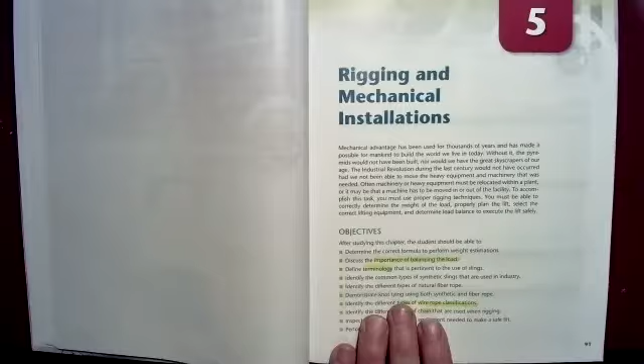So let's hit on some of the key things. Number one, we're going to talk about why you want to balance your load. When you're lifting, it's critical to have good balance. If you don't balance your load, then you might have a point that you are attaching to the load that has much more force on it than it should, and it might snap. So that's very, very important. Or if you're having a single point lift, it might flip over. Also bad.

Terminology is going to be key. As I've outlined in many classes in mechatronics, if you speak like you know what you're doing, you know what these terms mean, then you can communicate effectively with other members of your team, and you sound smart and people want to work with you. So terminology is key. We're going to spend some time on wire rope. Wire rope is the proper term for steel cable. Wire rope is just like it sounds. Instead of having strands of fiber like fiber rope does, it's got strands of wire.

We're going to talk about chains. That's important too. Chains are probably the most common use of rigging out in the general purpose world. You're going to see that all over most plants. You're going to see it all around any kind of construction. You're going to see that on the farm. Chains are probably the best general purpose tool for lifting.

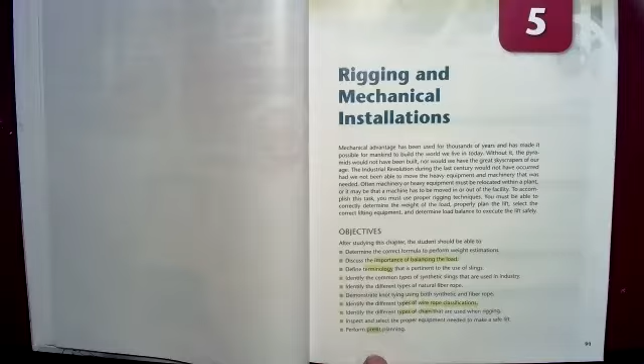And lastly, I'm going to emphasize pre-lift planning. Plan for the lifts. Unless you're just lifting something with a forklift that's a pretty ordinary load, you have to think about the steps that you're going to have when you lift that thing. So that's just what we're going to start with.

So, book review. The first section, 5.1, talks about formulas and weight estimations. And in the first section here, it just talks about units of measure for length. Great. You guys should all know that. Scan through the table. That's useful information. And it talks about some conversions. Useful, interesting. You should know the table's there. You might want to use this table later on when you do some calculations.

The book also talks about basic calculations for area and volume. And it gives you area and volume calculations for a variety of shapes. Cylinders, spheres, parallelograms, squares, rectangles, and a variety of formulas. I'm not going to quiz you necessarily on these, though I do have a couple questions in the quiz that touch on these. I am going to ask that you scan through this section of the book and remember where it is in case you need these formulas in the future.

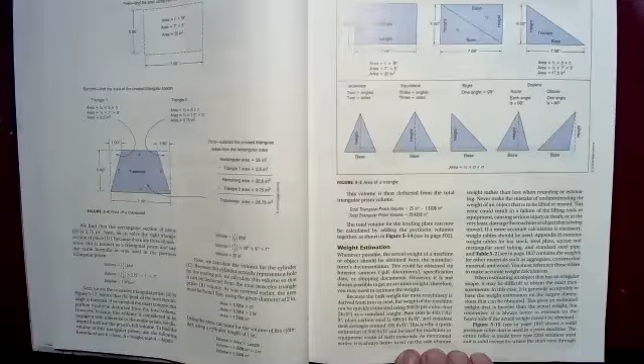The vertical center of gravity is very, very important. You have to be able to pick up an object so that the center of gravity is in the middle of the object. That means that my vertical center of gravity is symmetrical. So I'm picking up above my vertical center of gravity. Right? If something is very light on one end and very heavy on the other end, then I need to shift my lift point over towards the heavy end.

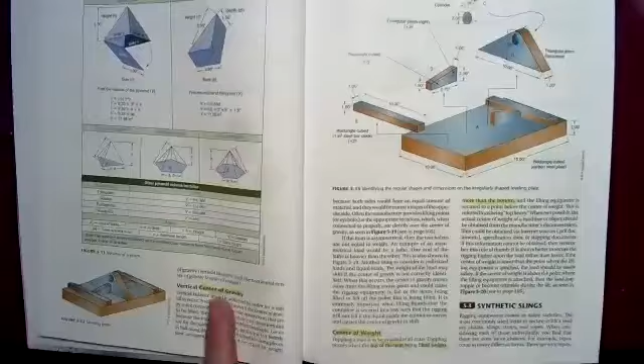Center of gravity, read through the definition. Center of gravity is looking at the weight and the position. Center of weight is more talking about something being top heavy or bottom heavy. Right? Center of weight, if I've got something that's very top heavy and I lift it from the bottom using a sling, then it's going to flip over easily.

Like if the sling is not cinched down, if I don't use a choke hold on that sling, and I've got something that's very top heavy, and I'm just a little bit off on my center of gravity, then that center of weight, that top heavy item, will fall over and pull it right out of that sling. So I have to be very careful to try to lift things directly over a center of gravity, and or try to lift things that are top heavy as little as possible.

So these are two very important terms. Center of gravity, center of weight. Vertical center of gravity, center of weight. They're talking about two different things.

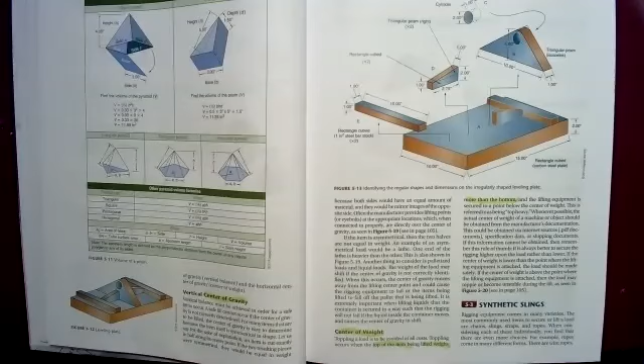All right, section 5.3. In section 5.3, we start talking about the slings themselves. Slings are ways that you can grab the object that you want to lift. Often we make a sling to grab the object, and then we bring down a big hook for a hoist of some sort to lift that object. So we first learn about slings.

And there's two key controlling things about slings. First of all, I want to mention OSHA standards. 1910-184 talks about your OSHA standards for slings. So hopefully you're already familiar with this standard, and you already understand some of the rules around slings. They have to meet certain OSHA regulations.

They have to be inspected and in good shape, and we're going to spend some time looking at the OSHA regulations in the OSHA class. But the key thing is we're also going to talk about inspections. Inspections are critical. So sling terminology is also important. They use different methods of tying slings to different objects, and they each have different effects.

A basket hitch, and we're going to look at the pictures on that later, is a way of looping a sling gently around an object to lift it. It's a great way of lifting objects that are bottom heavy, and a great way of lifting objects where you've got multiple baskets on the object, especially if you've got a spreader bar lifting so that you can have 2 points of lift, one on each basket when you're lifting something up. It's a nice, gentle way to lift something.

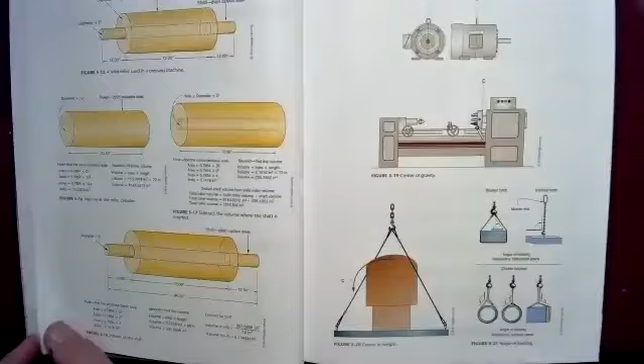And another term is proof load. You'll see that in here. So I'm just going to emphasize those terms. Very, very important terms. These are all part of the calculation slides. These are part of your center of gravity or center of mass.

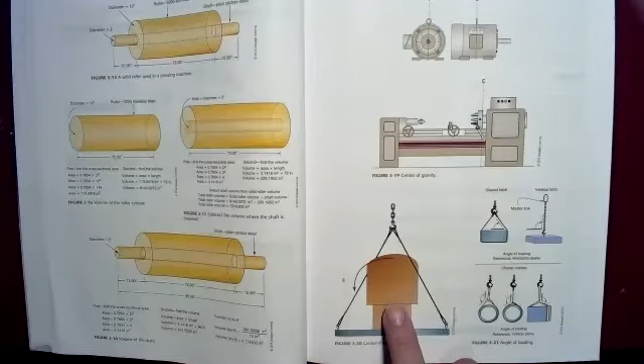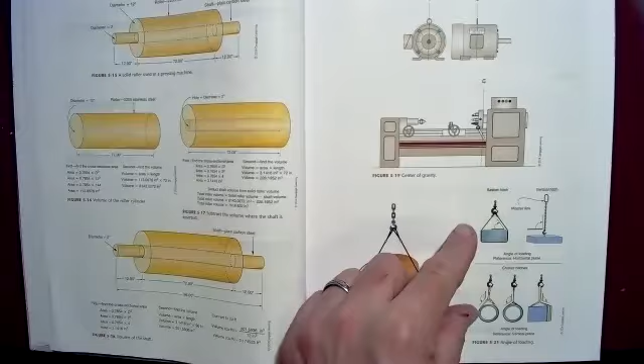Here they show an example of lifting something very top heavy. If it doesn't lift perfectly evenly, because it's top heavy, if you're just a little bit off center of gravity, then it'll flip right over. So this drawing here shows you your choker hitch and your basket hitch. So your basket hitch side view, you simply have a nice, gentle sling going all the way around the object.

This angle right here needs to be paid attention to because that angle will tell you how much you need to reduce the capability of that sling. So if you have a sling that can handle 1,000 pounds, you throw an angle like that on there, it can no longer handle 1,000 pounds. And we've got a chart to figure out how much less it can handle.

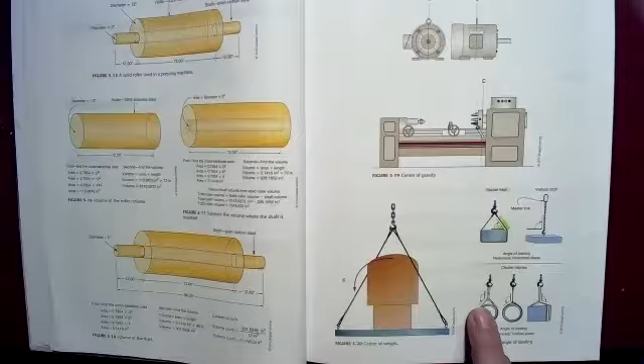However, when you're pulling straight up with a vertical hitch, then you get your full strength. In this case, you got a chain. That's a great way of lifting things, if you have a tie point, attachment point to be able to do that. And here are examples of choker hitches with different angles. The bigger the angle, the less you reduce the capability of that sling in terms of its maximum load.

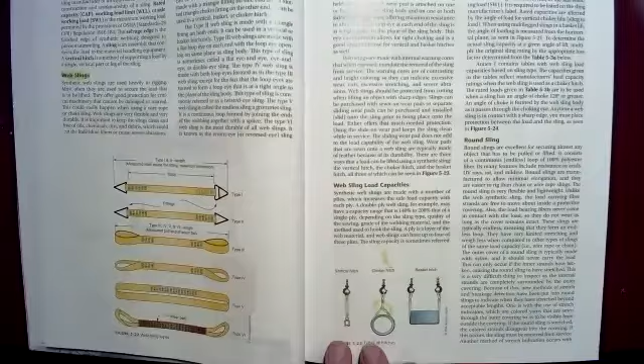So we're going to get into exactly how to calculate the maximum load based on the angles later. But now we're going to dive into the different kinds of web slings. And these are all examples of web slings. I'm not going to take you through them. You probably will be asked to identify different web slings in the future. So remember where this page is. You'll need to look these up.

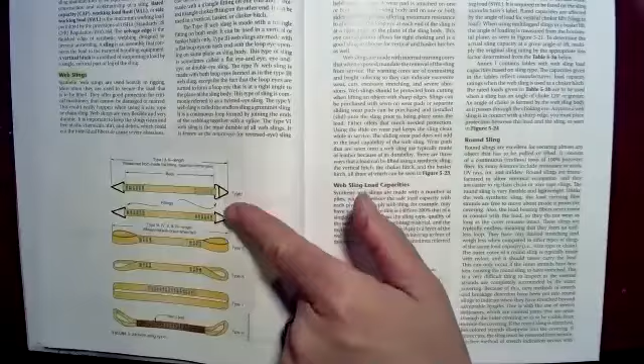I will mention one thing about these. You're going to see web slings where they've got a steel ring of some sort. These are triangles, not rings, but they've got a steel ring of some sort attached to one end, kind of sewn into one end, and other web slings that have loops. The loop ones are more general purpose. They can be used in choker hitches and a variety of other hitches.

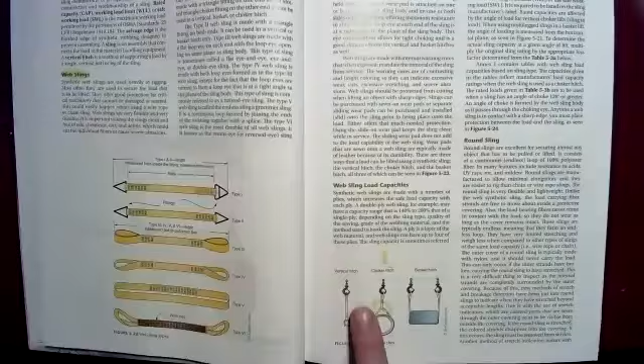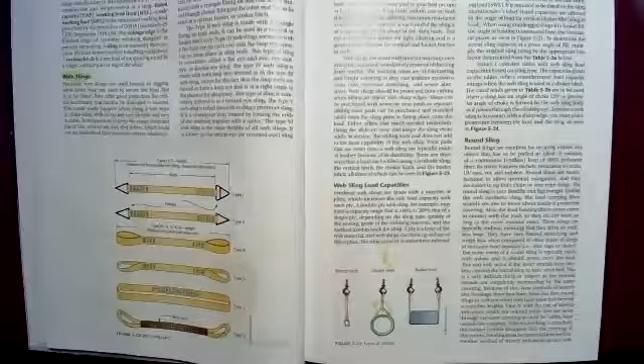They're designed really to be lifted by relatively large area hooks, like the hooks you see over here. Or they're designed to be lifted by large rings or by themselves. These two at the top with their little triangles on the end, they're designed to be lifted by smaller hooks, by chains or other kinds of steel attachments, where you have steel hooks that are small grabbing the ends of those slings. So just a little mention of that.

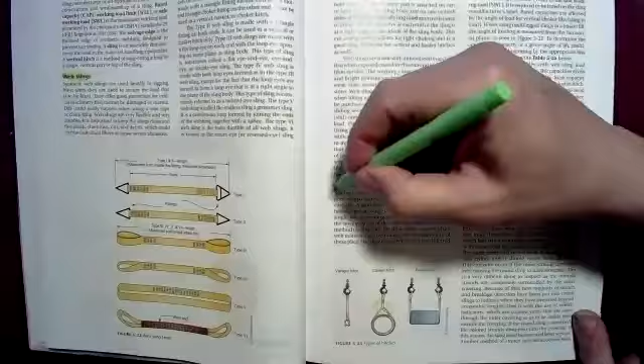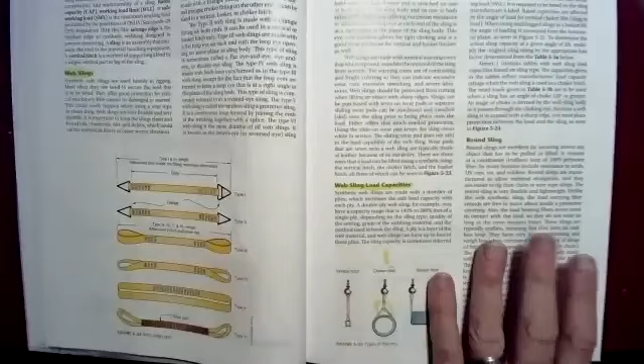There's a couple of words about web sling load capacities. That just sort of repeats what I said earlier. That's important to remember. We also talk about round slings as a separate category. I don't think I've seen as many round slings out there as these web slings. So read through that. They're useful to know about, but I'm not going to emphasize that.

Fiber rope and securing. I use rope a lot around the farm, around my general work, and I do a lot of lifting with rope. You're not going to find that as much in industry now. In industry, because you're relying on knots, because you're relying on the individual skills of the people using that material, you don't see a lot of fiber rope. But there's a good section on it. It's a very useful skill to have.

I am actually an Eagle Scout, so I know all about the knots and I'm pretty good with them. But we're not going to emphasize knots and fiber rope as part of this course. Unless you guys are interested, then we'll do a little Eagle Scout knot tying work in some future lab that'll be fun and interesting, and a bonus, not a core part of this course.

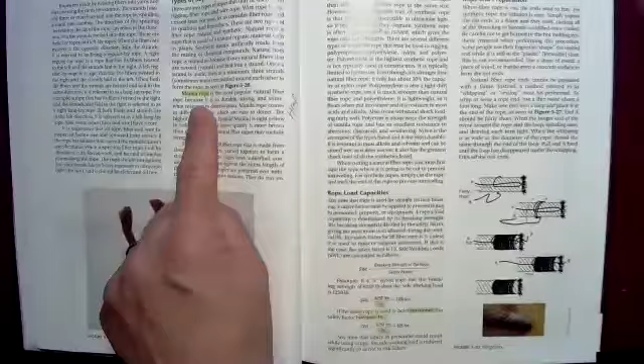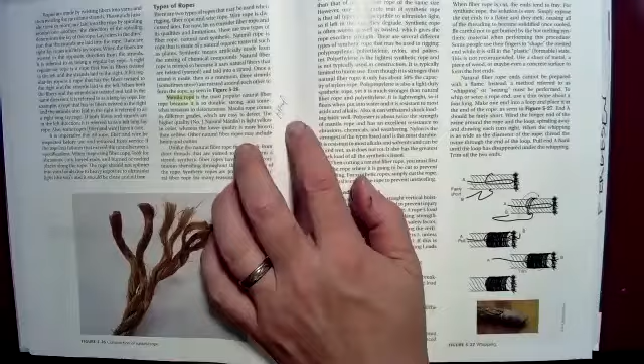This is part of the round sling. Let's skip that. Fiber rope comes in a lot of flavors. You've got manila rope, which is your standard natural fiber. We also have hemp rope, which is becoming more common because it's actually a little bit stronger than manila. It's used a lot for nautical applications. You're going to find hemp rope used in traditional sailing vessels and things like that. So it's becoming a little bit more common.

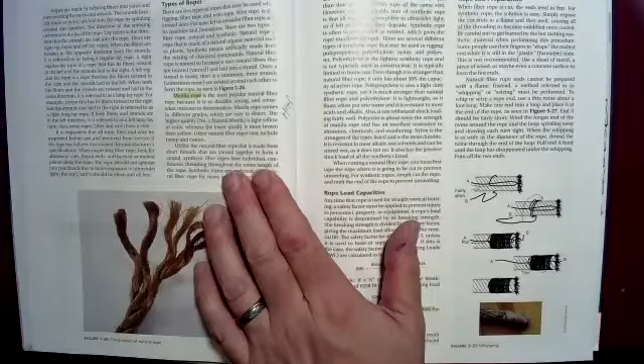But for the most part, for fiber rope, you're going to find nylon, polypropylene, and that sort of thing. And they all have different loads. Nylon and polypropylene tend to have the issue that they can get melted easily. They stretch a little bit. So when you're lifting a load, they've got a lot of stretch. And that can create a problem because loads can bounce and stretch and that sort of thing.

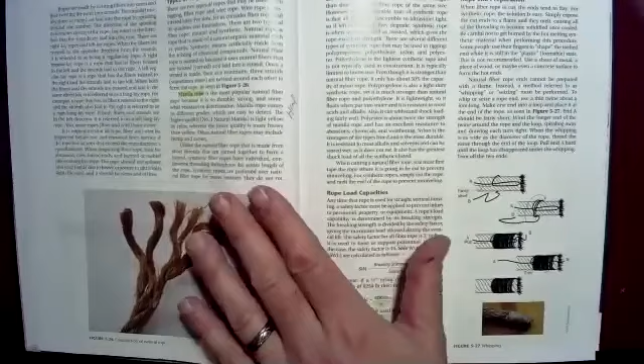So there are issues with that, but they are still excellent tools. Both of them are excellent tools. Hemp, manila, and all the polypropylene and nylon ropes are excellent. They all have different uses in general purpose lifting.

I will say this about rope. Generally speaking, when you're lifting anything, you want to have 5 times as much capability on your rope as the load you're lifting. In other words, if you're lifting 120 pounds, you want a 600-pound rope capability. So you want 5 times.

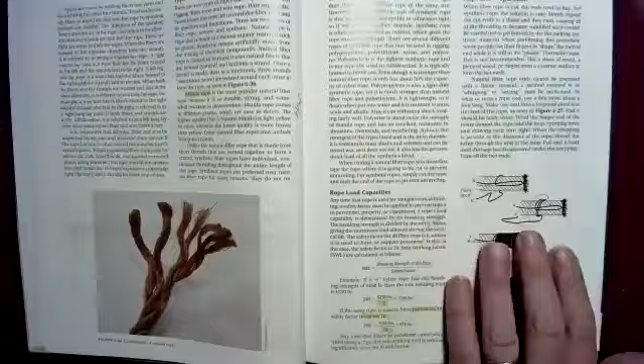And if you're going to lift a human being, in other words, you want to set up a lift to get the person up to a higher position or climb the rope to get to a higher position, you want 10 times the amount of capability in rope. So these are factors in rope use. End rope preparation is very important, especially for natural fibers. In fact, pretty much only for natural fibers.

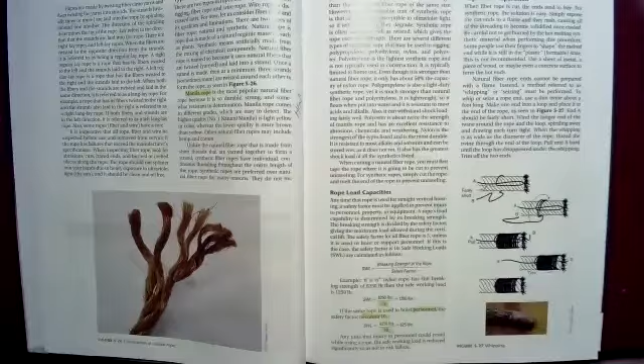Rope whipping is sort of a dead skill, very useful. If you guys want to learn how to do natural fiber rope whipping, I can teach you that as well as part of my Boy Scout skills. I am not going to go through all the knot tying in detail. It's useful, but not critical for mechatronic skills.

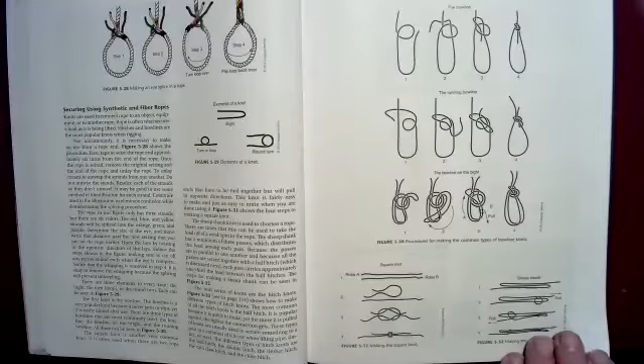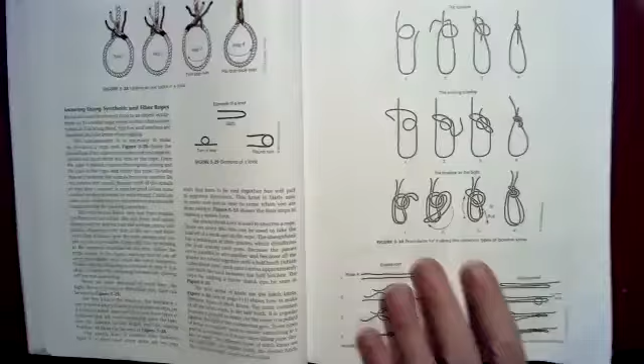If you are a camper or a hiker or a Boy Scout or kids within Boy Scouts, you may want to learn these things. Or Girl Scouts. Girl Scouts, in my experience, haven't traditionally gotten the same level of knot tying education as Boy Scouts. Hopefully that's changed since I was in the Scouts. So all of y'all learn to use knots. It's a very useful skill. And if I get critical mass that want to learn that, I will teach some of that.

All right, so let's skip to the section on this. Actually, let me